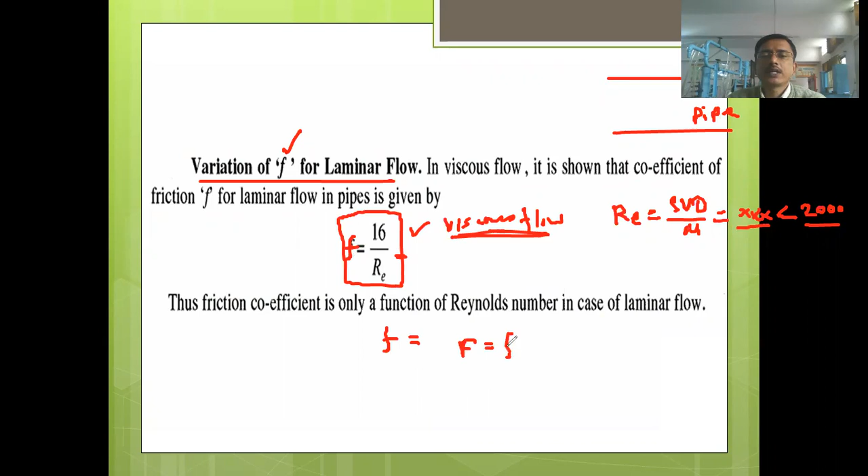Sometimes they also use the term capital F. This term is used for friction factor. They are related to each other. Capital F, that is friction factor, is equal to 4 times the coefficient of friction.

If friction factor is given, then this formula will become 16 into 4, that becomes 64 divided by RE. Now in this formula, if it is 64, then this F will be called friction factor. If it is 16, then this F will be called coefficient of friction.

So this thing we should know and keep in mind. First of all, write down this title, then write down this formula. Also note down the relation between friction factor and coefficient of friction, and note down this formula as well.

Sometimes in the examination they may ask MCQ type questions based on this formula. For the viscous flow through the circular pipe, what is the relation between coefficient of friction and Reynolds number? They will give different options. Option A, F is equal to RE divided by 16, or F is equal to 64, or any value they may give here. If they give 64 here in the question, then you have to be cautious.

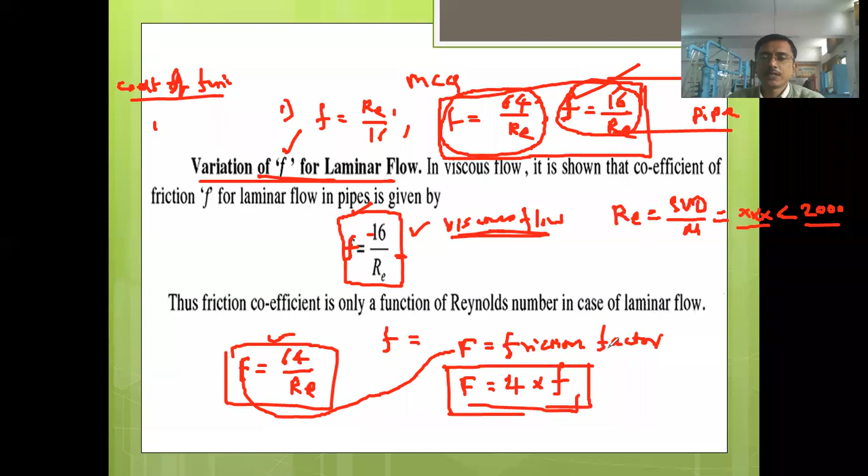While attempting the question, we should be cautious about the name mentioned there, whether it is coefficient of friction or friction factor. So this thing we should keep in mind.

So have you written this thing, written this formula in your notebook, the title and formula? If you have not written it, do it now, write it first. Once again, I will write here for the friction factor.

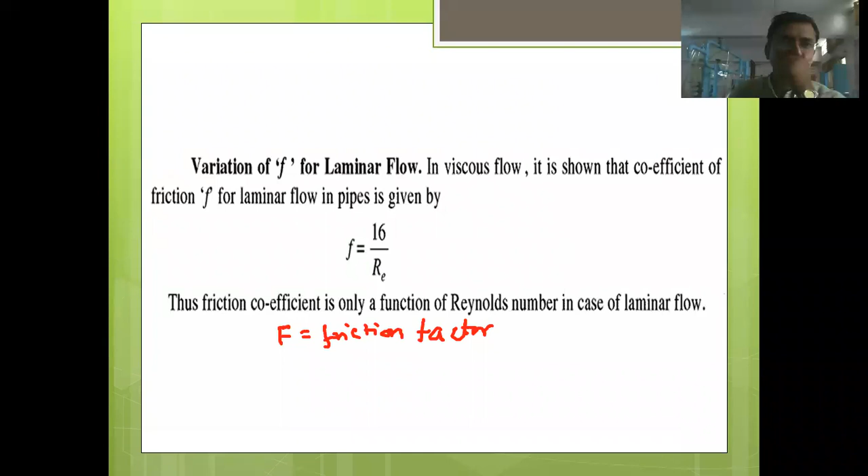Yes, we were talking about this friction factor. I have written this friction factor: Capital F is equal to 4 times small f. Sometimes instead of f, they write f dash. Some authors use f dash for coefficient of friction.

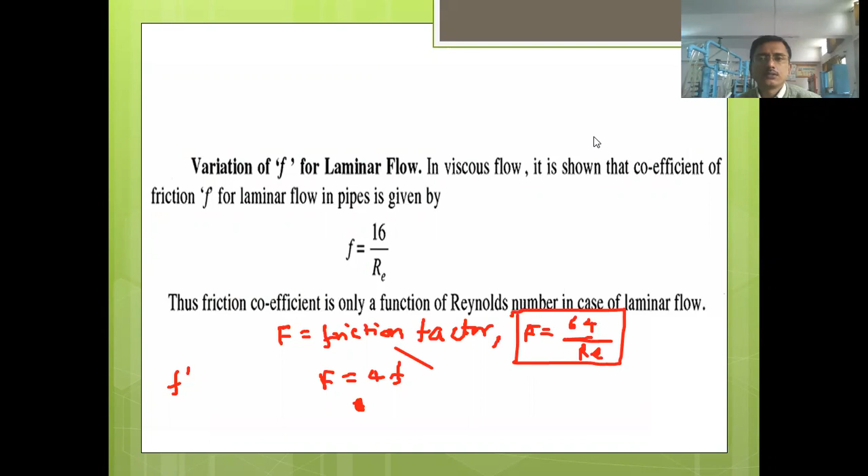So here you can note down this formula also: Friction factor F is equal to 64 divided by RE. I think all of you have written this formula, and we will go toward the next title.

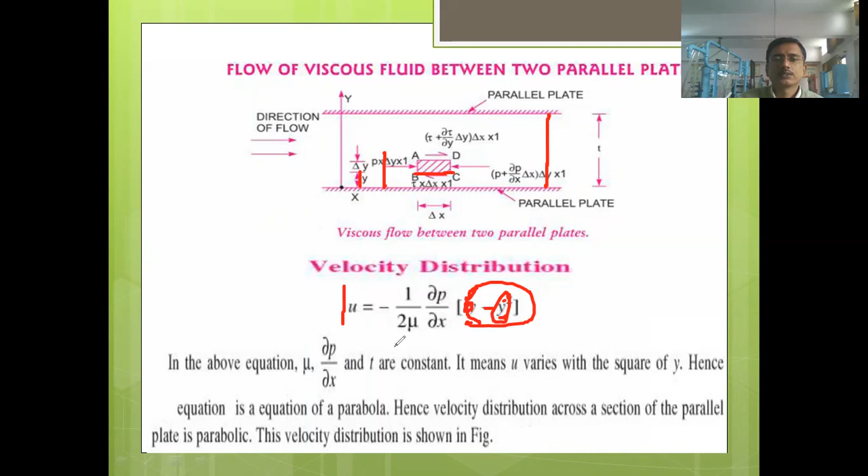As we go in upward direction, the value of y will go on increasing. So this value will go on increasing, and as the value of y goes on increasing, this total value will become larger, not smaller, because this minus sign is there. So you can see in the diagram how the velocity profile will take place.

It will be similar to the velocity profile of the circular pipe. Again it is a parabolic shape curve for the parallel plates, because the equation has power of 2, y to the power 2. So it is again a parabolic curve, and you will observe the velocity distribution look like this.

And this is the shear stress distribution, and this is the equation for shear stress distribution: Tau is equal to -1 upon 2 del p upon del x into t minus 2y. So we have to by heart all these equations.

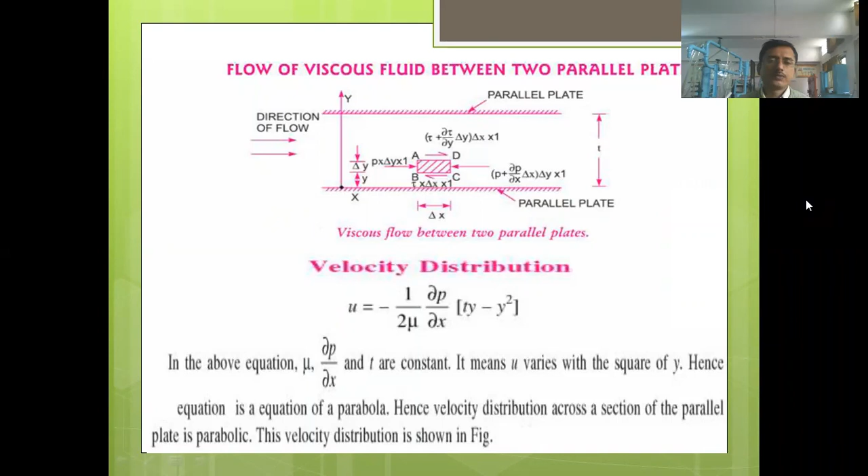In the above equation, mu, del p upon del x and t are the constants, and here it means u varies with square of y, hence the equation is the equation of a parabola. So we will get a parabolic equation for this velocity profile.

Next, write down shear stress distribution. Write down this equation and draw the diagram: velocity distribution and shear stress distribution across a section of parallel plates.

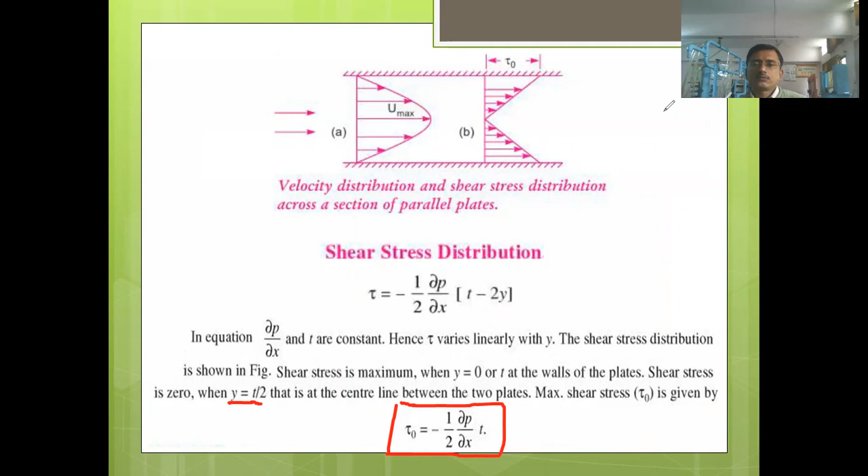See, the next equation is regarding the shear stress at the plate. So tau is equal to, when we put y is equal to t, okay, y is equal to t by 2. Shear stress is 0 when y is equal to t by 2, meaning at the center, and that is at the center line between the two plates. Maximum shear stress is given as, so this is the equation for maximum shear stress.

Ratio of maximum velocity to the average velocity. So we have seen the relation between maximum velocity and average velocity for the viscous flow through the parallel plates, and viscous flow through the pipe. So what was the equation that we have seen there?

We have seen that U max is equal to twice the average velocity, so maximum velocity is double the average velocity. But for the viscous flow between two parallel plates, this equation is different - it is 3 by 2, or 1.5 times. Note down this equation: U max is equal to 1.5 times the average velocity, U bar.

Next equation is for the drop of pressure for a given length of a pipe, P1 minus P2. There also we have seen the same type of equation, but instead of T here, there was D square. As these are plates, not a pipe, the distance between them, represented by letter T, has been used instead of diameter D.

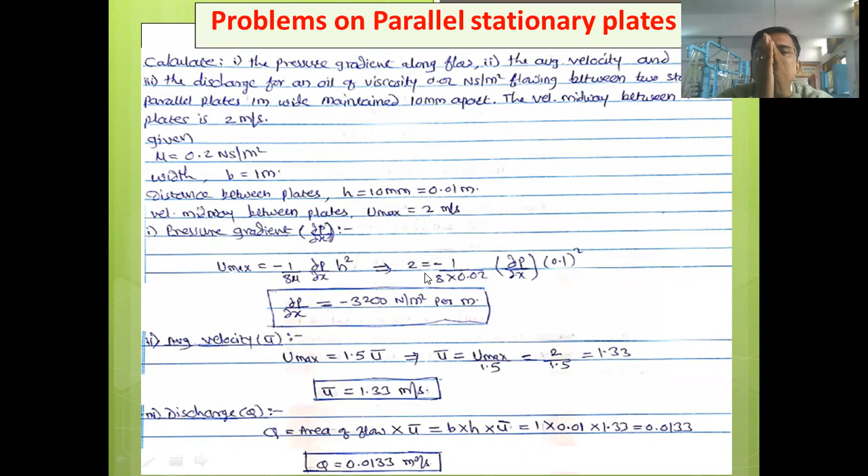Is it over? Let us solve the problem now. Calculate first the pressure gradient along flow, second the average velocity, and third the discharge, for an oil of viscosity 0.02 Newton second per meter square, flowing between two stationary parallel plates, 1 meter wide, maintained 10 mm apart.

The velocity midway between the plates is 2 meter per second.

So let us first of all write down the given things. Viscosity is given. Width of the plate is given. H is given, the distance between plates.

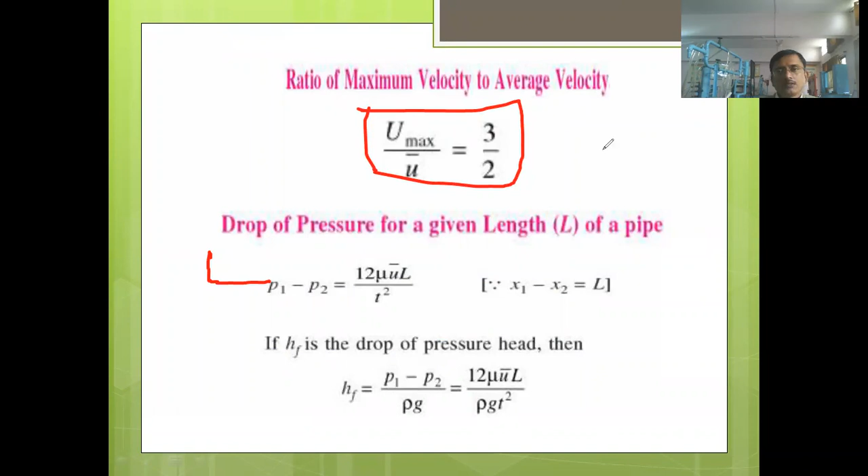You already have found here, you can see. U max is equal to 1.5 U bar. So if I take this 1.5 here, it will become the denominator, and we can write this equation also as: U bar is equal to U max divided by 1.5.

So U max is known to us there - put that value of U max. U max is given in the problem, but they have not directly mentioned it as U max; instead they mentioned it as the velocity at the midway. So velocity at midway is nothing but the maximum velocity, that is U max.

So 2 divided by 1.5 will get 1.33 meter per second, which is the average velocity. Okay, then what else did it say to find?

The average velocity and the discharge for an oil of viscosity 0.02 Newton second per meter square. So the next question is to find the discharge. For finding the discharge, we have the equation Q is equal to area into velocity. This velocity is nothing but the average velocity, we can write it like this also.

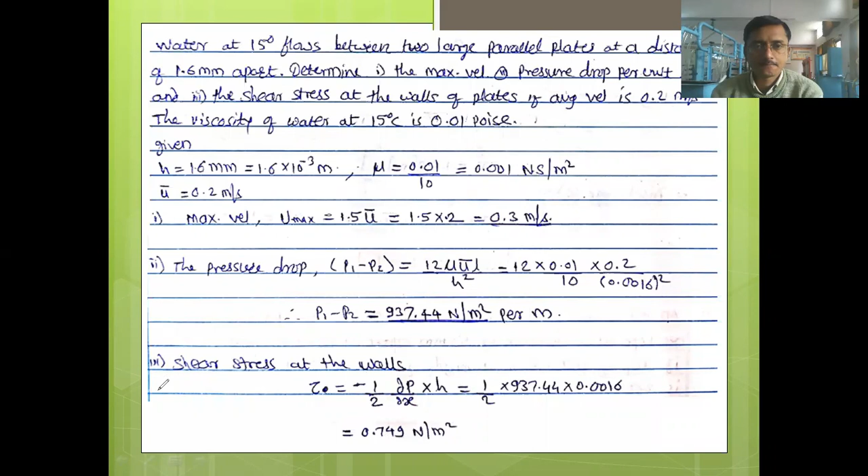Is it over? So this is the end of the viscous flow.